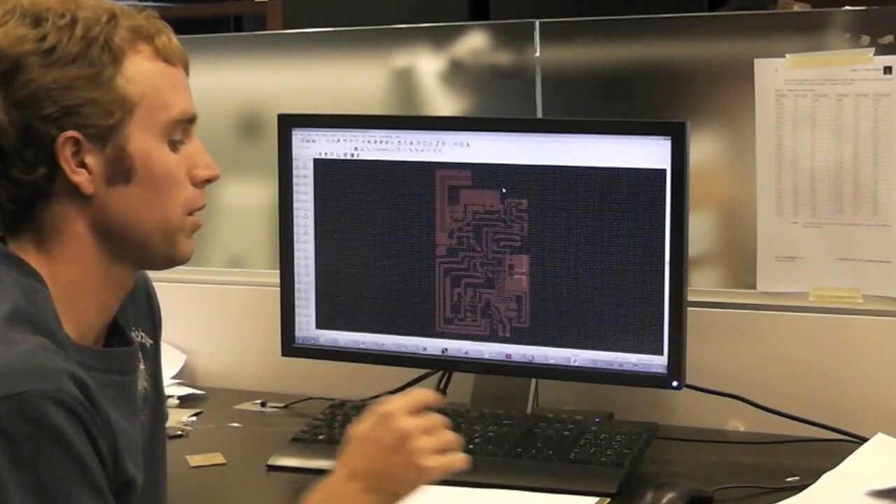We've created this layout. We're going to export it to a Gerber file. We could have used different ways of converting it into a bitmap, but the way we're going to show is from a Gerber and then to a bitmap file. So I specify Gerber drill file here. Export it.

Then I need to convert it into a bitmap file, and I use a software called Magic. From this Magic software, I open up that Gerber file that I just saved with ADS. So now we have basically a pattern in our Magic software. The reason that we use Magic is because we can specify exactly the dots per inch that we want to print out.

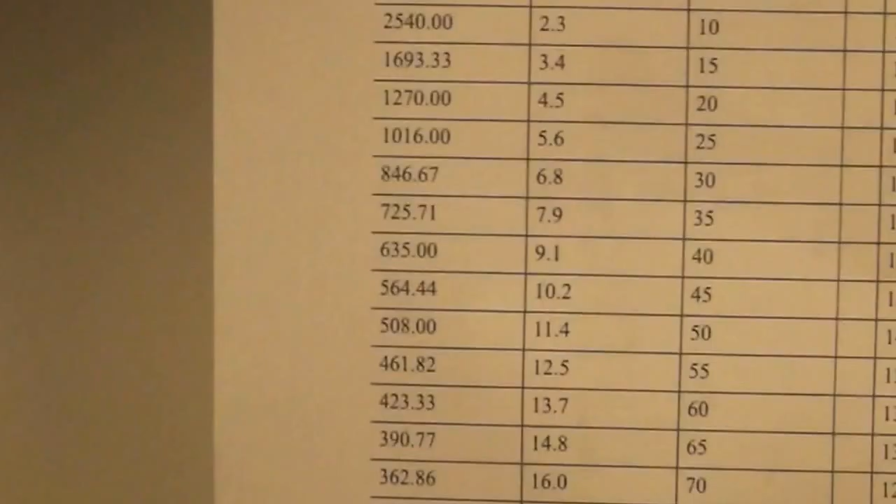These dots per inch correspond exactly to the drop spacing. There's a sheet in the printer manual that basically tells us this drop spacing. We're using a drop spacing of 20 micron, and that corresponds to a DPI setting of 1270. So next we just hit OK, save this file as a bitmap. That's it. Now we take this file and we're going to plug it into the printer.

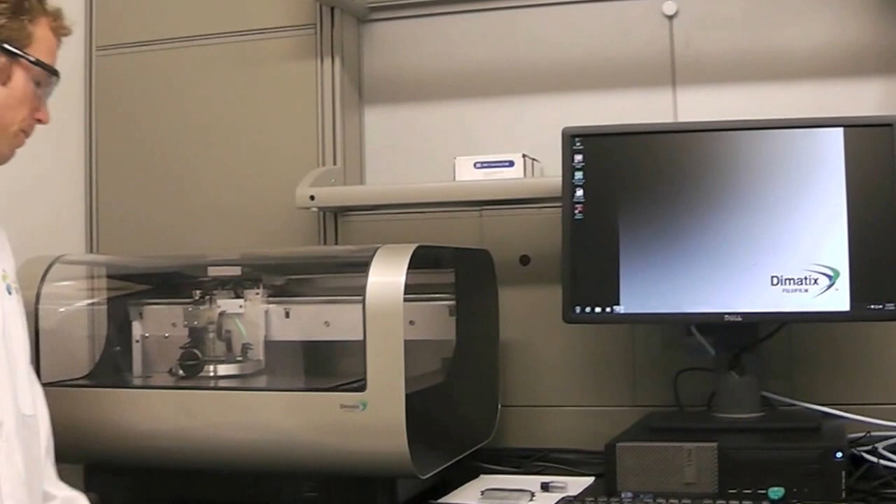Okay, so now we're in the lab, and this is the desktop printer that we use. We've just taken a USB from upstairs with the bitmap file that we generated, and we put it into the computer. The computer is hooked up to the Dimatix printer, just like a regular desktop printer you'd have at home.

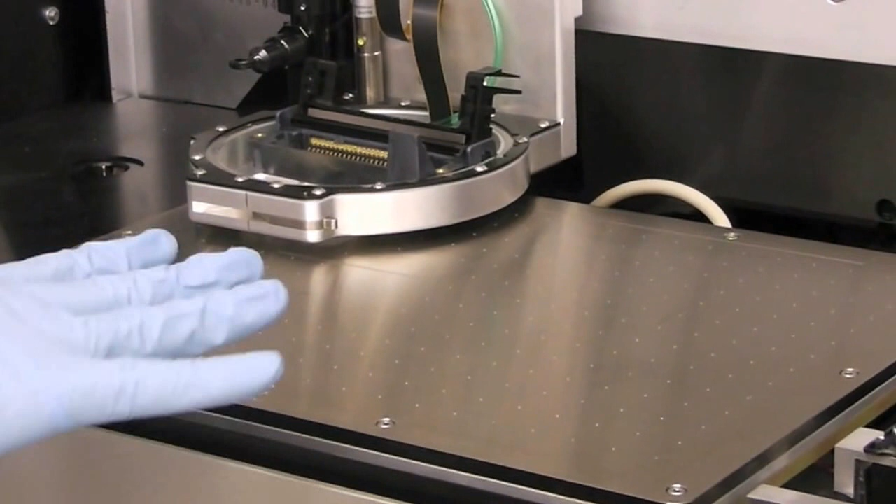It's a little bit different than your desktop printer because it has this stage with 5 micron accuracy of placement. This is called the platen, the stainless steel plate, and it can move up and back, and it can also rotate, so you can align your pattern and the drops will land where you want. This printer does raster scanning, so this cartridge holder is going to go up and back and work its way down the platen to fill out the pattern.

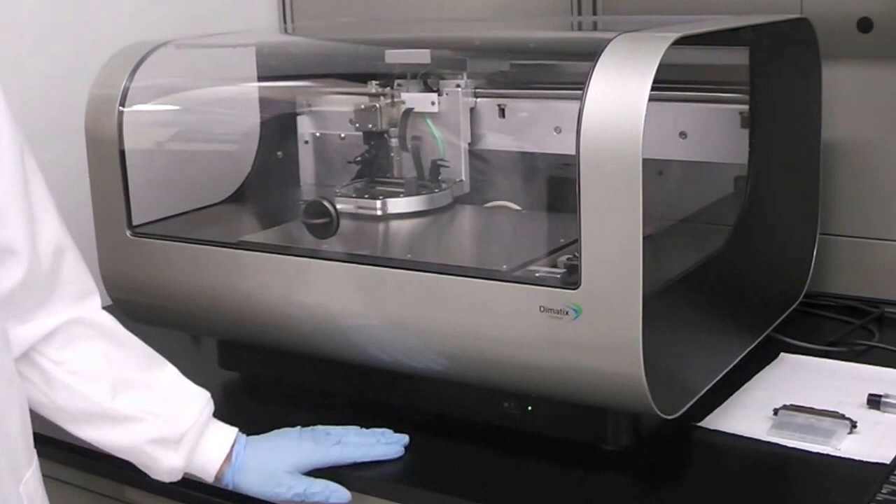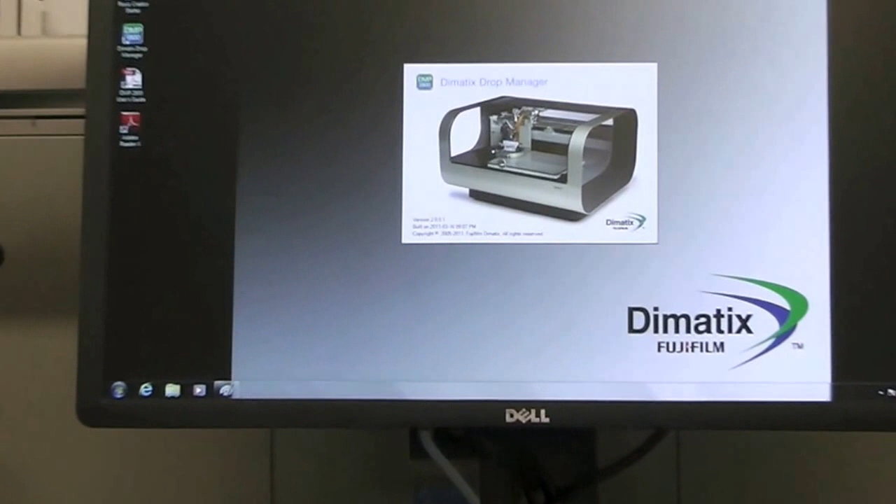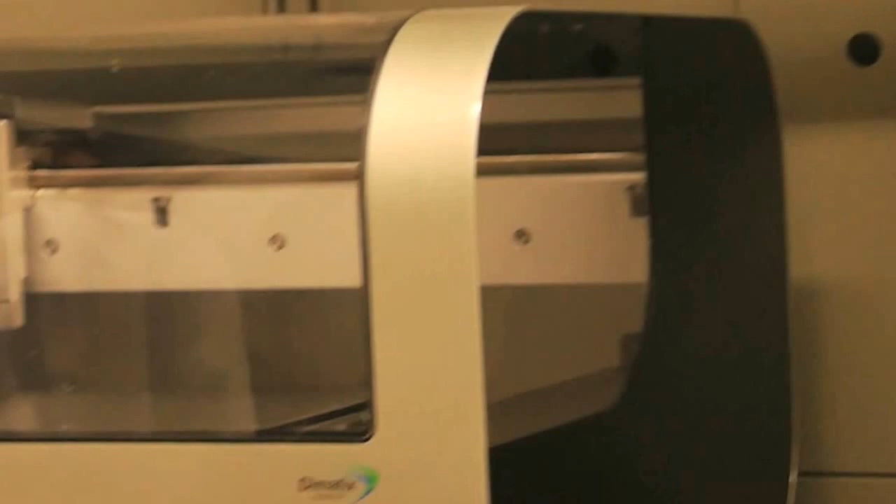So we'll just turn the printer on right now. This is the Dimatix Drop Manager software, which controls the printer. When it first starts up, it does a calibration. You have to make sure nothing's inside the printer when it does this. The stage moves back and forth, and the cartridge holder moves around for its initial calibration. Alright, now the printer is ready to use.

So we can load that bitmap file that we had previously. We just go to Tools, Pattern Editor, Bitmap Images. This is the bitmap pattern converter. From here we load the file that we had upstairs, open bitmap, and here's the image that shows up in the software.

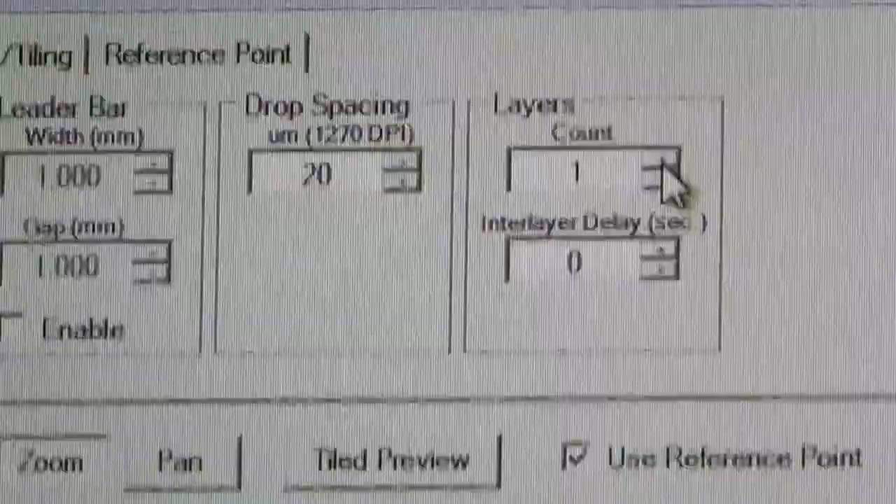Now on this screen we can change the number of layers. Let's say you printed one pattern with one layer of ink, and then you wanted to increase the amount of ink, so you would just print right over top with another layer. You can do that here with the layers count button, increasing it to however many layers you'd like. The drop spacing is also set within this program. Because upstairs we did the bitmap image with 20 micron drop spacing, we're going to do the same thing.

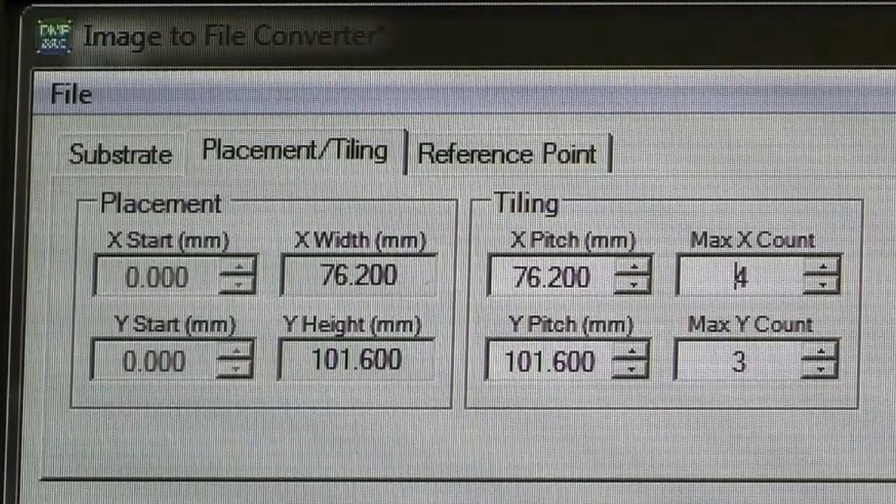Okay, this tab is for placement and tiling, and we can multiply the image. So if you wanted to make 5 of these images instead of just having the one here, we just increase this count. And you can see all the images get duplicated. However, that's going to take more time to print, so we're just going to show one for this example.

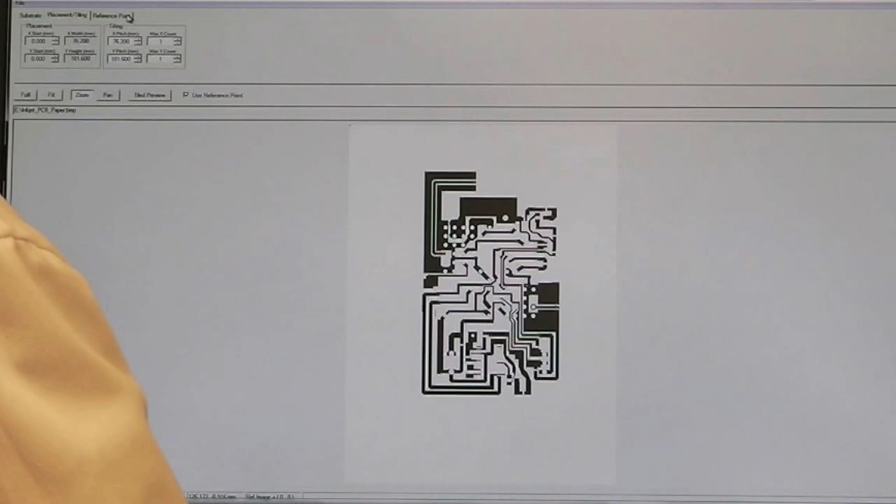Also, you're able to pick a reference point on the image. So this kind of tells the printer in reference to the image where it will start printing. So for example, if we picked the top left point of the image and set that as our reference point, that's where the first drop of ink is going to land. So when we pick that point on our platen, that's where the image is going to start being printed. And now we just save this file.

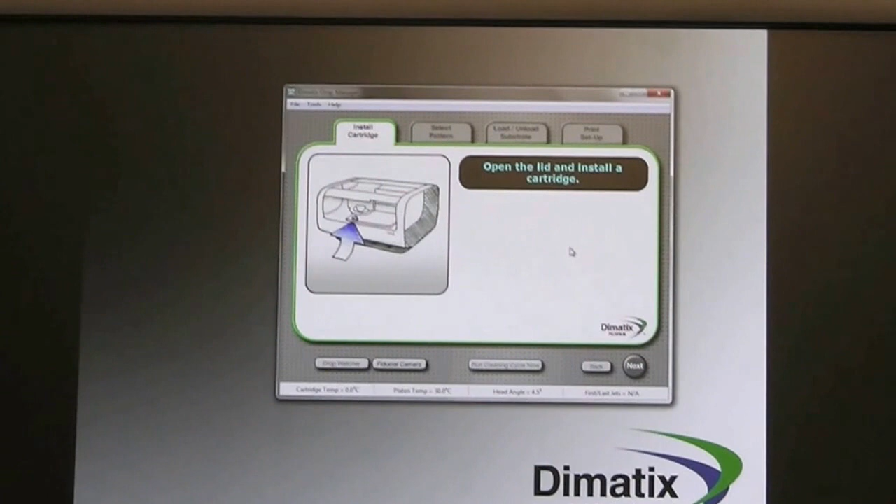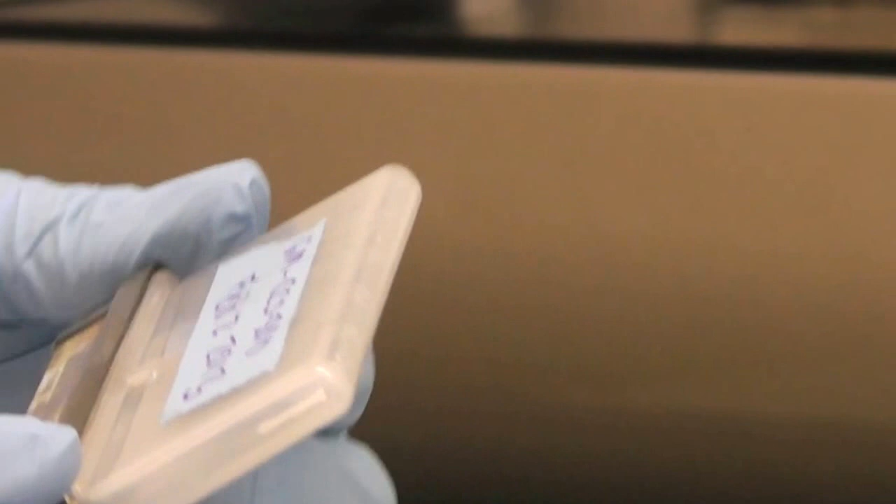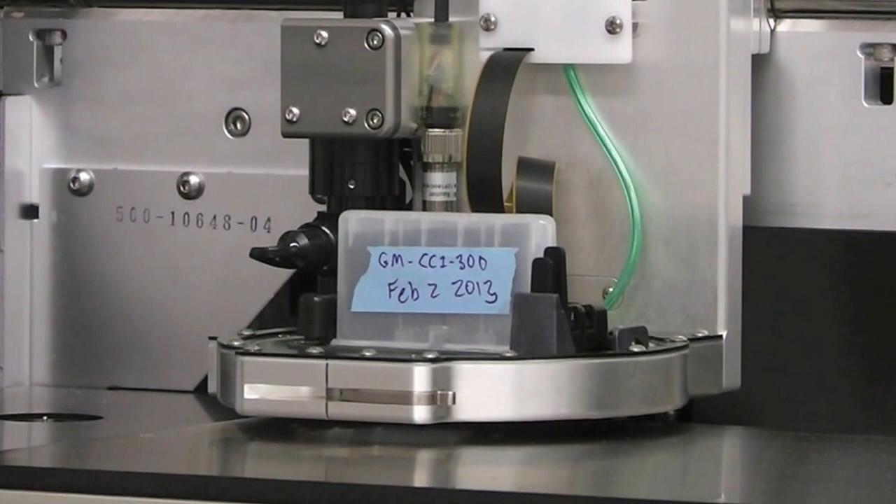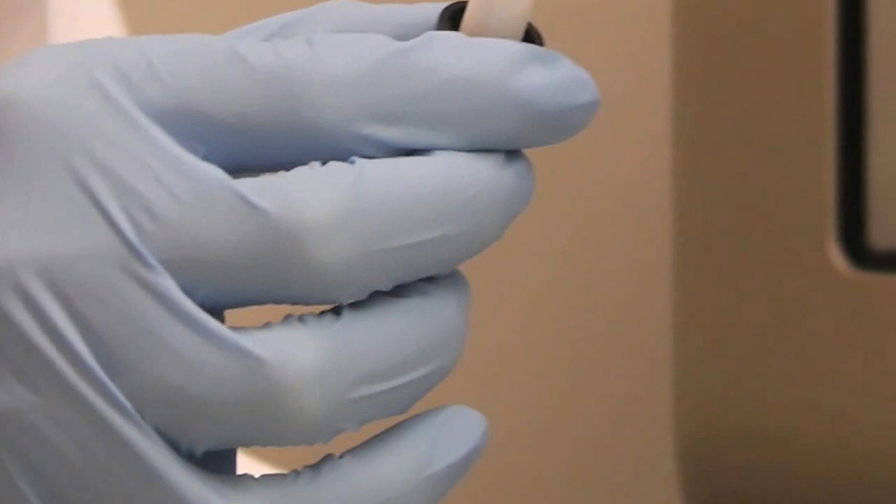And they just snap right into the printer. So this is a cartridge holder. We just snap them in and out. Also, there's cleaning pads that we use because sometimes there's ink that builds up on the bottom of the cartridge. So the cleaning pad is just like cloth material that the printer dabs on to clean off the excess ink.

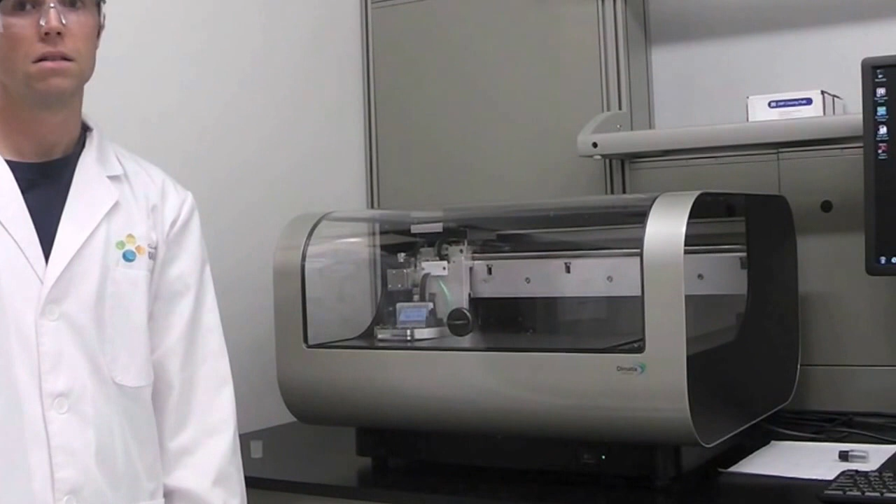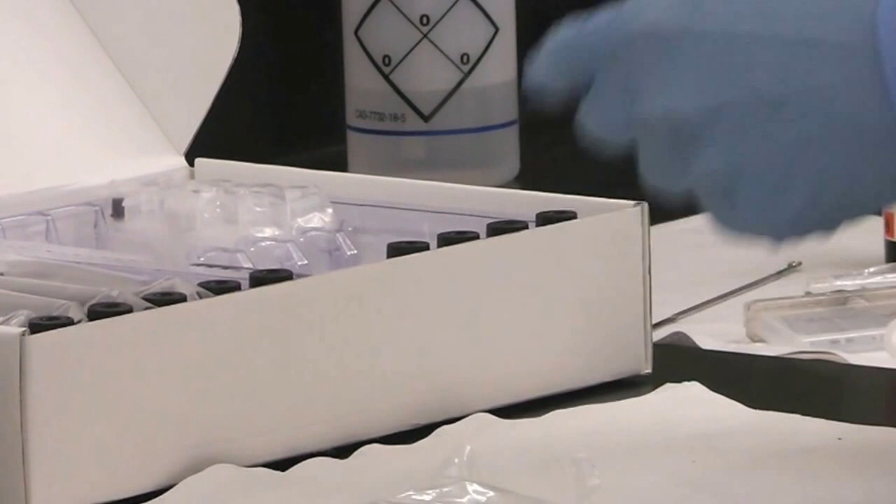Okay, now I'm going to go over there and show the cartridge put together. Okay, so this is the Dimatix material cartridges that we're going to use with this printer. I mean, there's other companies that make their own cartridges that go with their own printers. This is just for the Dimatix. This is what we're using. And the cartridges come in two parts. So there's the cartridge head, and then there's the ink reservoir.

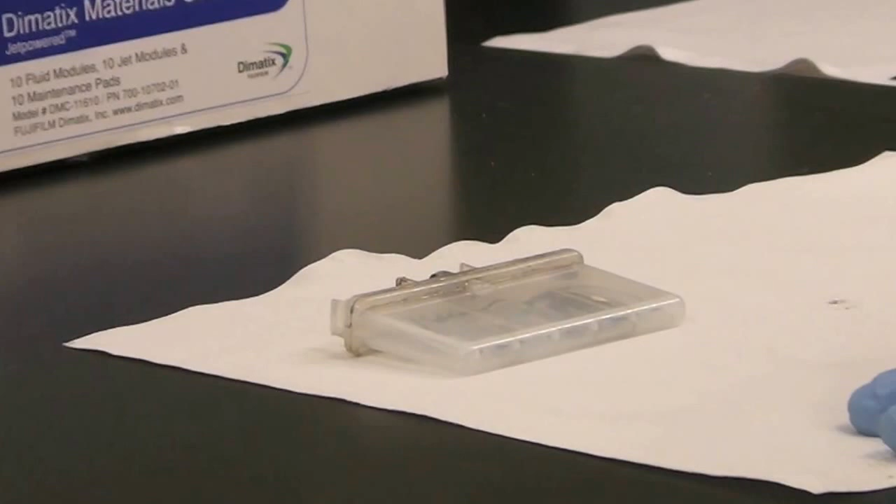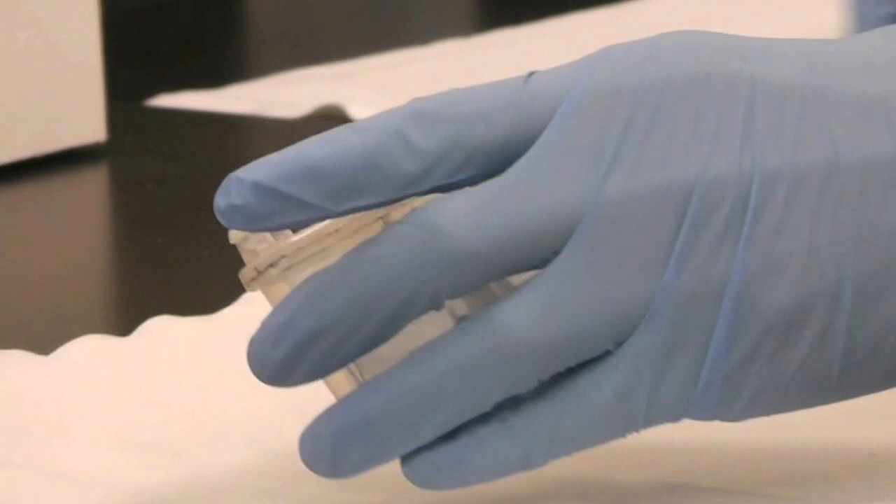And instead of opening a new one, I'll just show an older one that we have. So this is a cartridge head that's been used, and this is the ink reservoir that's been used. And what we do when we take a new one out, we physically just take a syringe and a needle. Hopefully I don't stab myself.

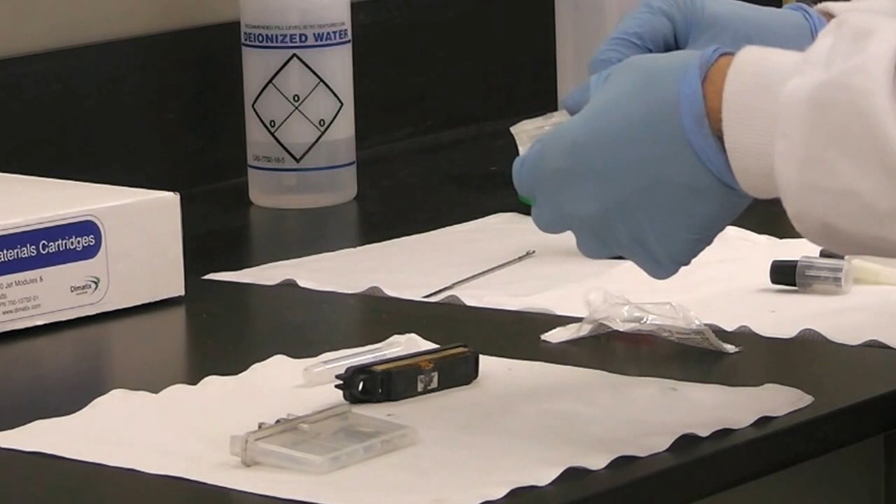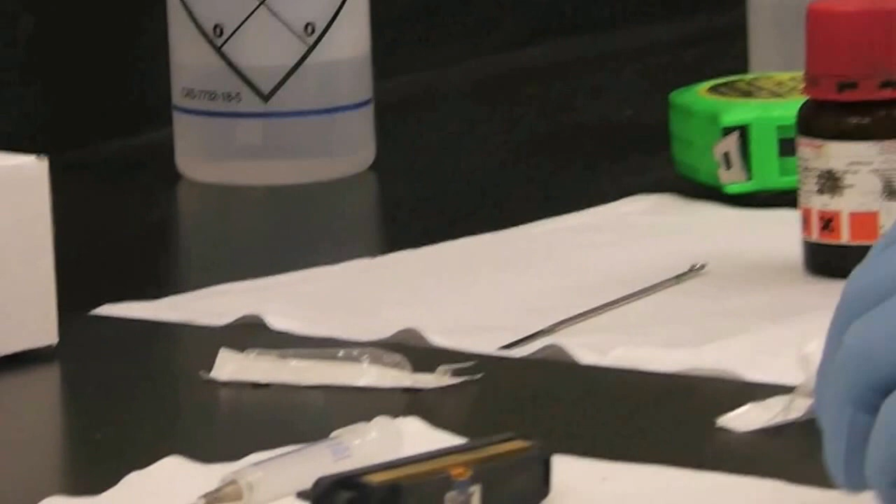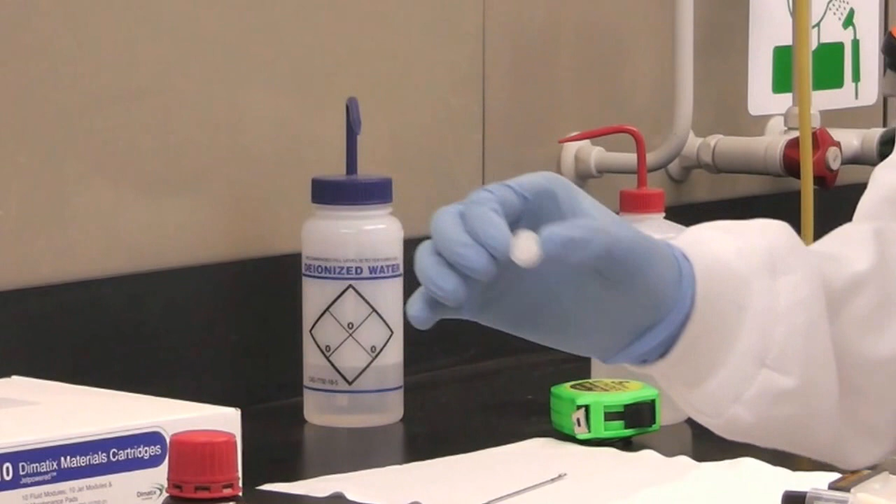And we're going to use commercial ink for this example, but there's all different types of ink that you could use. So this is a silver nano-particle ink from Sigma Aldrich. And we just basically open this up, draw out the ink, and then before we fill it in the cartridge, because we don't want large particles to clog the nozzles, we use a filter, and we're using a 0.2 micron Teflon filter, and we put that in the needle. Imagine it was filled with ink. And then we physically just put the ink into this cartridge.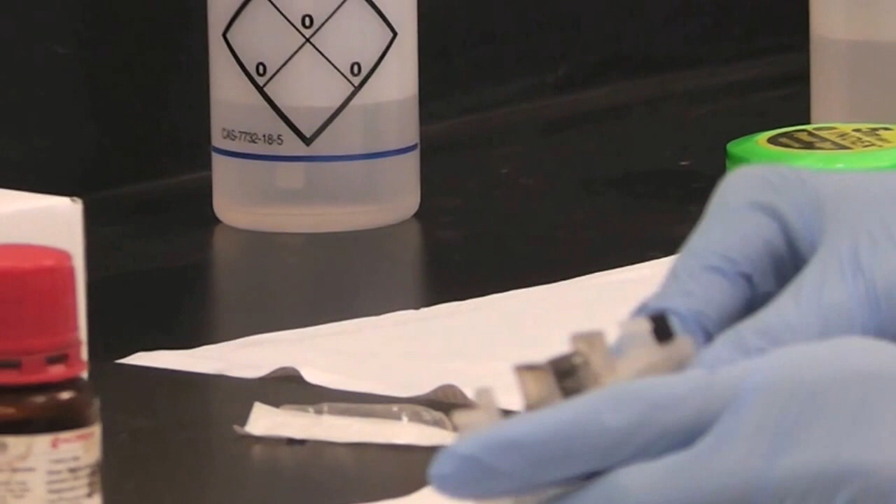And Dimatix cartridges have this locking mechanism so that once they are put together, they're stuck. What we do is there's two tabs here, and we just snip off one of the tabs so that we can reopen and close them. So if you want to refill the same cartridge with ink, it's easy to do. Then we just put them together. They just snap.

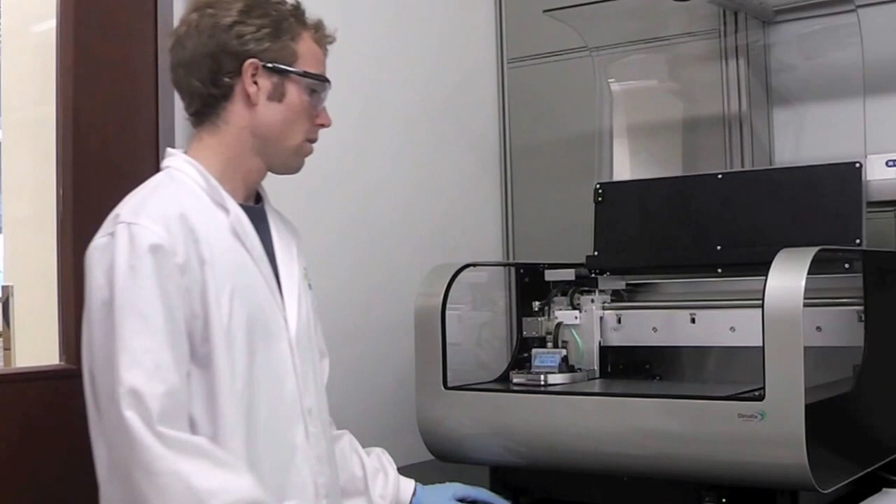That's that. So this cartridge that we have right now, this was filled for the first time on February 2nd, and now it's May. So we've used this cartridge quite a lot and refilled it. And you can see that there's actually quite a bit of ink leaking around, and it's quite dirty. So this cartridge is probably on its last legs, and we might want to throw it away and get a brand new cartridge. But we'll try and print with it and see how it goes.

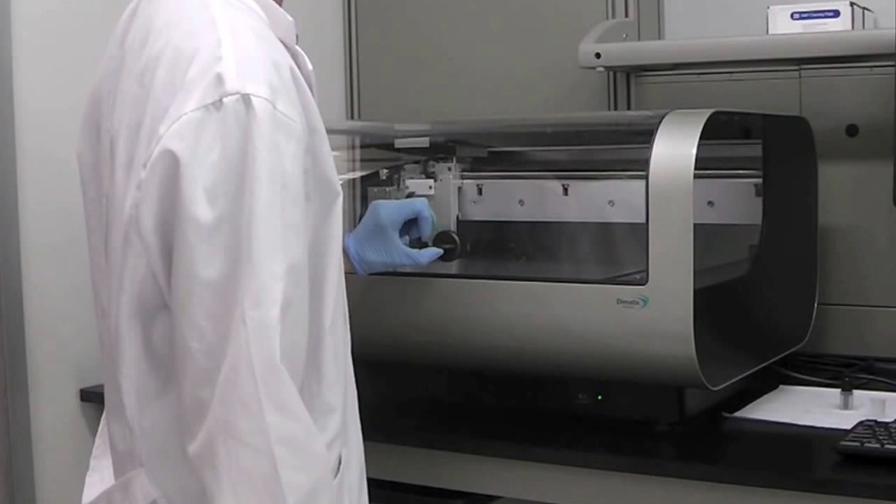Okay, so back to the software. The first step is that the printer asks you for the cartridge settings, and inside of here is the voltage waveform. Because it's a piezoelectric printer, it uses a waveform to eject the ink. So we have a preset waveform that we use for this type of ink, and it has to be tailored for the ink that you're using. I'll just show you the waveform here.

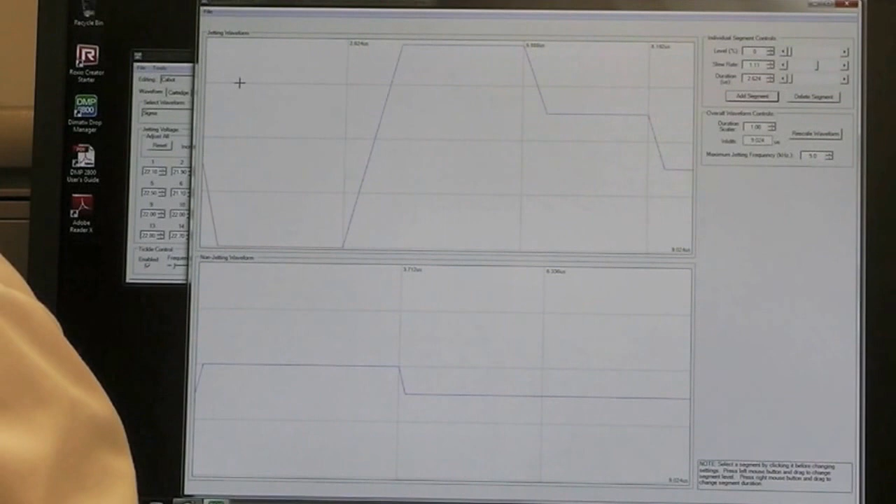So here's the waveform that we are using, and this can be changed. All these different points can be changed. So this is a voltage; the x-axis is the time, and the y-axis is the voltage. So this is our jetting waveform, and you can change the settings of this waveform with these controls here.

Also, there's a non-jetting waveform, and this is just kind of to tickle the ink when it's not being used, so that it's kind of stimulated so it doesn't settle to the bottom, or basically so that it won't print while it's in an idle state.

So the next part is selection of your printing pattern. And we just select that pattern file that we chose before. And it shows you a little picture of the pattern on the side so you don't get confused. And the next step is to load your substrate on the platen. So the substrate we're going to use is HP Inkjet paper. But we could alternatively use plastic or glass or whatever you'd like.

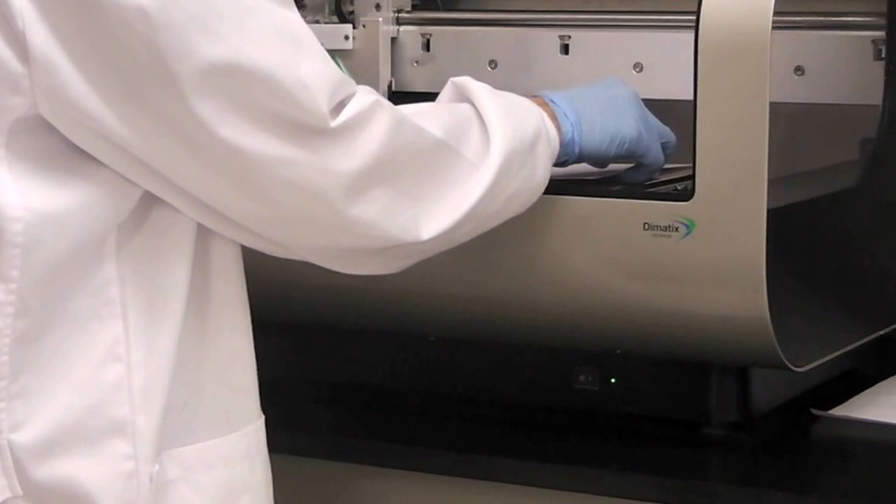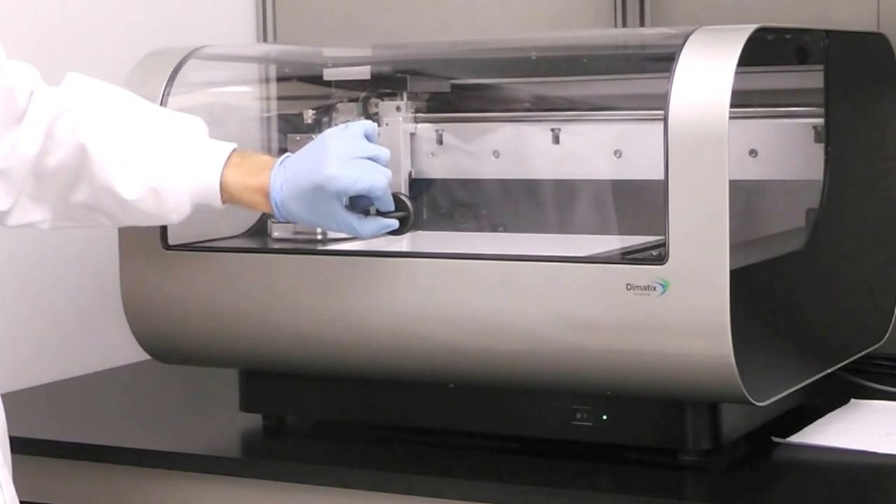And the platen has holes in it with a vacuum. So when the vacuum's turned on, you put the paper over top of it, align it on the platen, and it'll suck it down. Oh, the vacuum isn't on. There we go. So now that sucks your paper down flat. Okay.

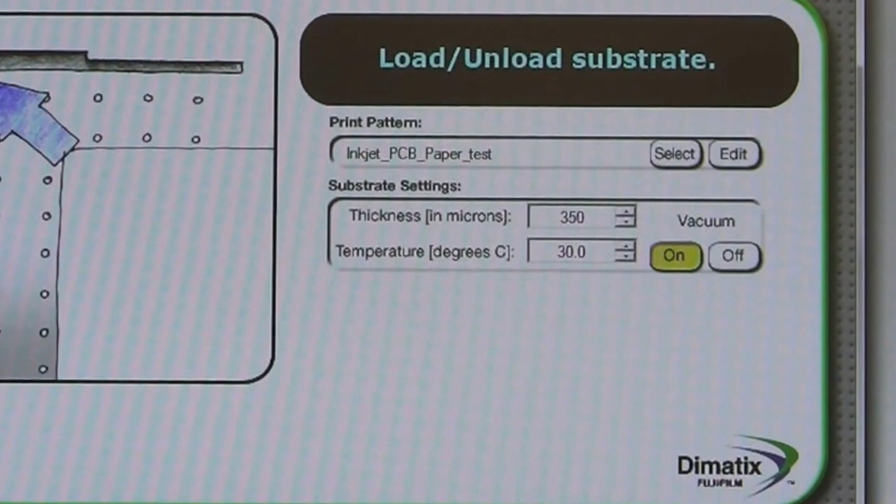So now that we've loaded our substrate, it asks what's the thickness of the substrate. So you can set the height above the substrate that you want to print. If you make it too high, the drops actually start to waver and they won't land where you'd like. So you'd like to print as close to the surface as you possibly can. So we're going to choose 560 microns.

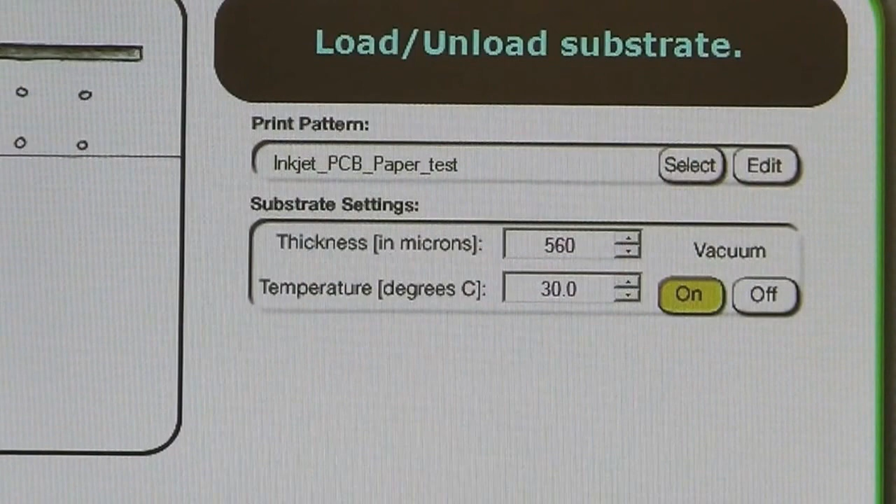This is also where you set the temperature of the platen. So I'm printing at 30 degrees Celsius, but it goes up to a maximum temperature of 60 degrees. Okay. Just as a final check, the last screen just asks what the thickness is. This is the temperature, this is the pattern that you're using, and these are the settings that you're using for the printer.

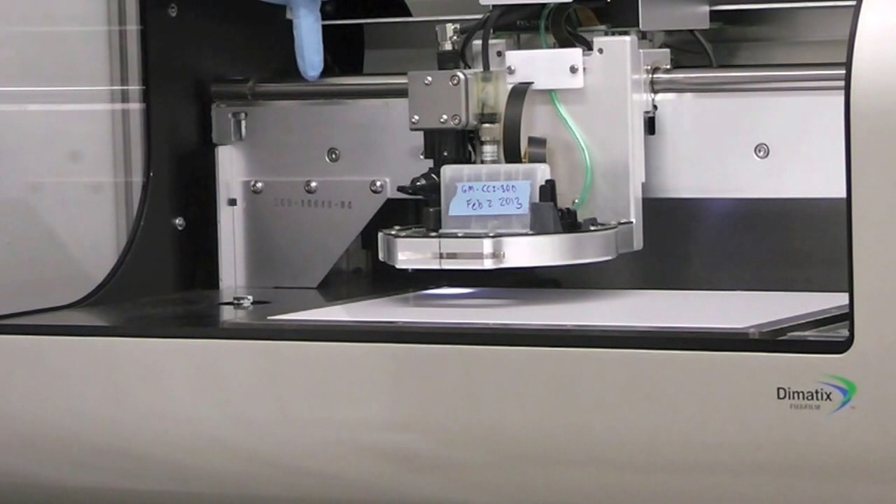Then what I normally do is I choose my point on my printer that I'm going to print, and I use the fiducial camera button to do that. So inside of the printer you have this camera right here, which is a fiducial camera, and it shines a light on the paper, and there's basically a cross you can see in the software where it's pointing at, and you can pick the point where you want your pattern to start.

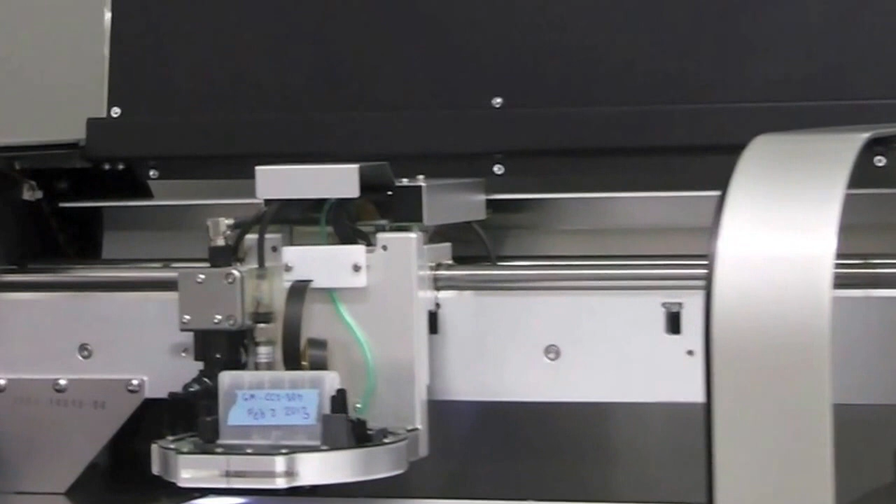There's also another camera over on this side, and there's a function within the printer that you bring your cartridge over here and you can actually see the drops as they're coming out of the inkjet head. And we'll show you that in a second.

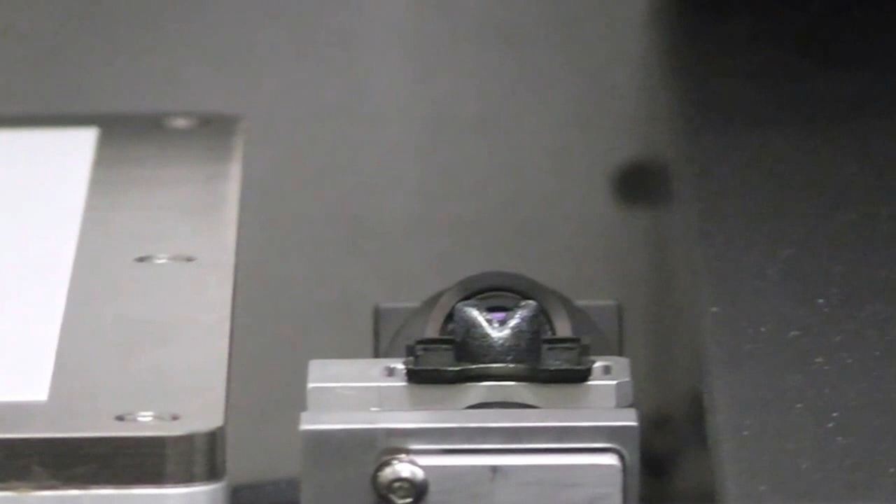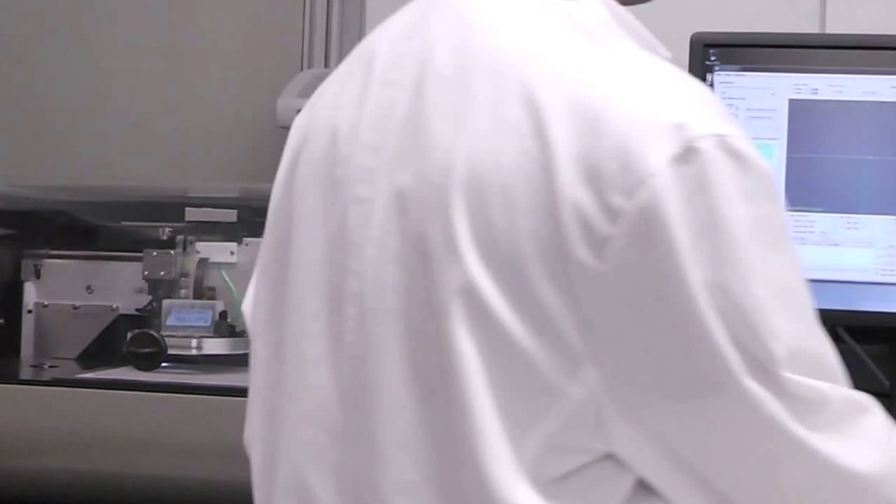So now from the fiducial camera, I can go anywhere on the paper that I'd like to start. So now I'm somewhere in the center of the paper. I have a small pattern, so this is fine. So I could print here, for example. So to print here, I hit Set Print Origin and choose that position.

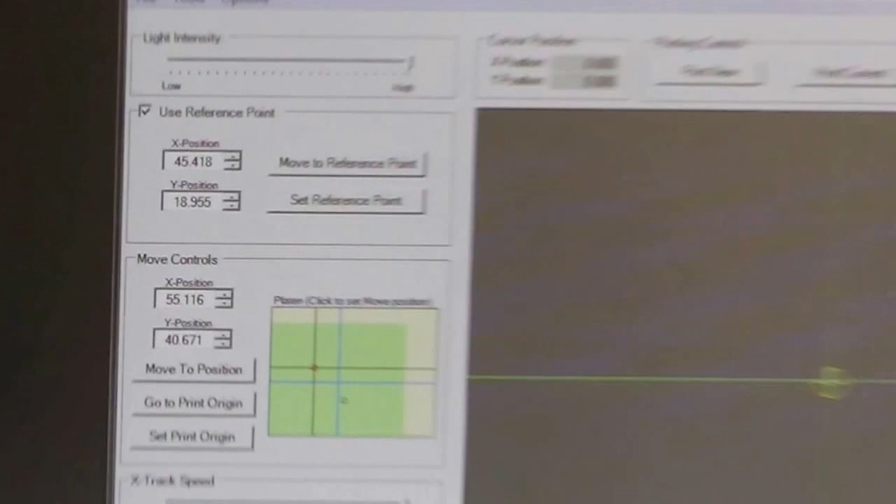And because I also use the reference point within my pattern, I also choose my reference point and put it in the same position. So I'm going to start printing there, and that's going to be where my pattern reference point was as well.

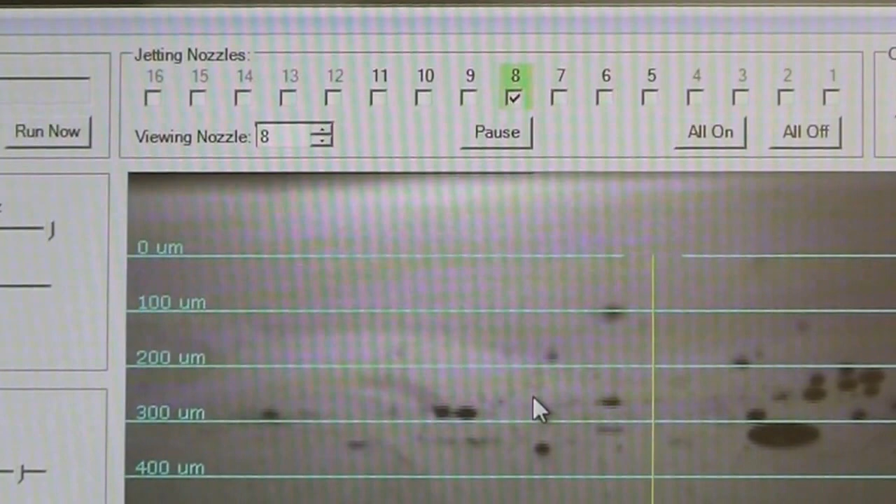So now I'm going to close the fiducial camera. I've picked my place on the paper to print, and I go to the drop watcher. So this will show me if my cartridge is actually going to work. So here, there's 16 nozzles on these cartridges. And you can choose any of these 16 nozzles to print with, or you can print with all of them if they're all working.

So we can see that the drops are coming out of the nozzle on position 8 and 7. And I can shut this movie mode off, and it just does a strobe. So you can see how fast these ink drops are coming out and what they look like. You can see that 8 is on kind of an angle and unstable. So I definitely wouldn't use that.

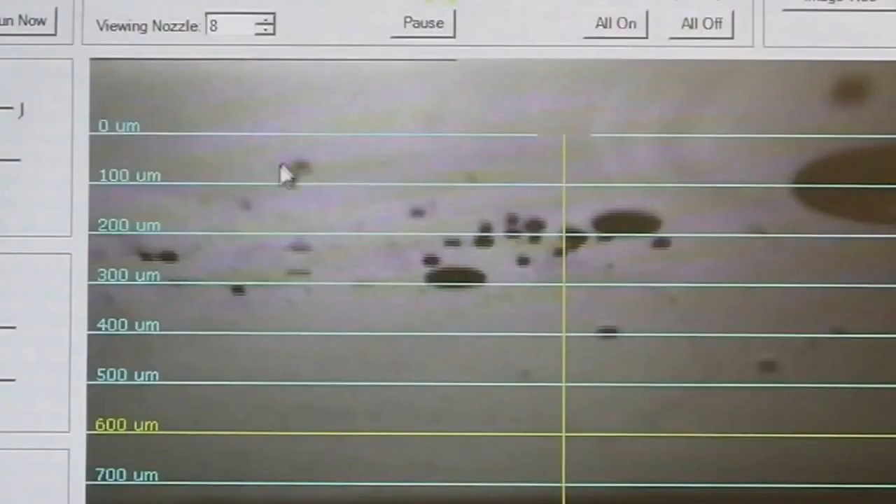Six is also not looking great. It's not too bad. And I generally print at a velocity of 9 or 10 meters a second for this ink. So if I say the delay is 100 microseconds, and there's distance markers on this screen, so if the ink drop started at 0,

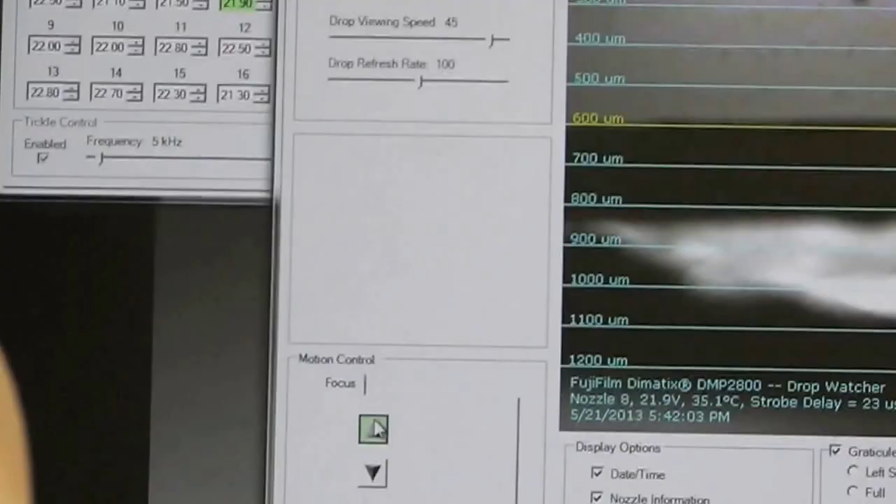I'll just change this. You can also focus this camera by using these arrows. So here we're starting at 0, and if I look now 100 microseconds later, I'm down at about 800 microns.

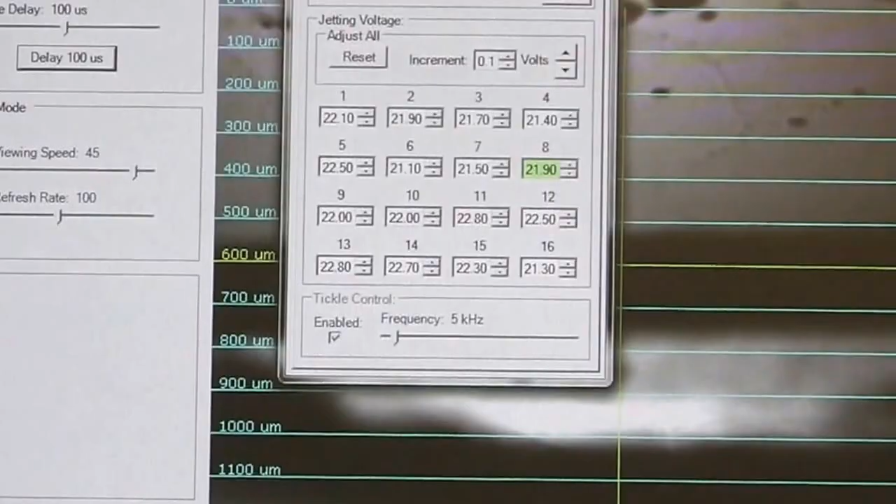So I'm just going to increase the voltages. In this screen you can increase the voltages of each of the printing nozzles individually. So I'm going to increase 8 just a bit, or 7, so that it hits 9 meters a second.

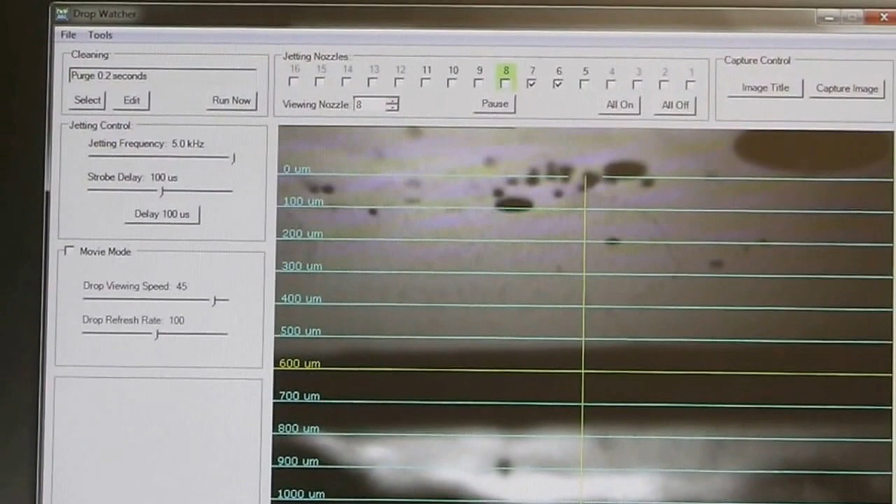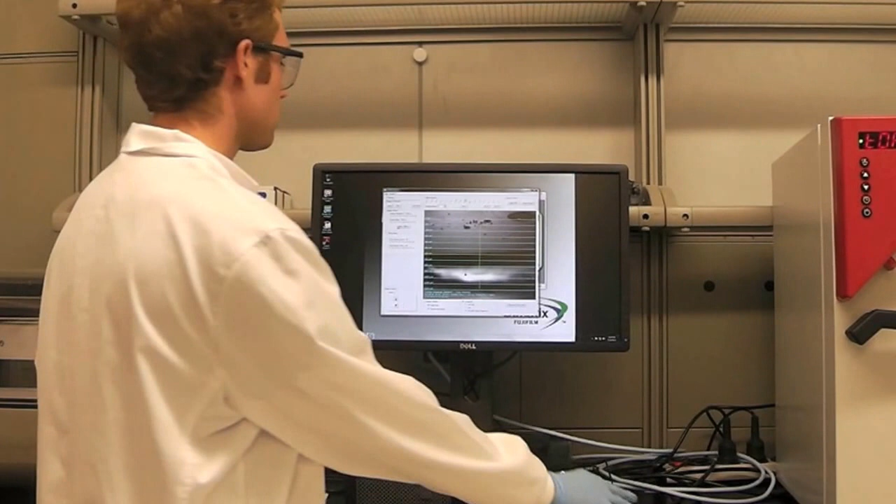Okay. Also 6 has become unstable now, I think because this cartridge is getting old. So I'm only printing with the one nozzle, 7. So within the cartridge settings, you need to tell it that it's only going to print with number 7. So I say that the first jet is 7, and the last jet I use is also 7. So only one jet is going to print.

Inside of here, you can also set the temperature inside of the cartridge. So with some inks, you might want to use a higher temperature. Depends on the viscosity and the characteristics of your ink. You can also set this meniscus vacuum, which is the vacuum inside of the cartridge head. So if you didn't have a vacuum inside, the ink might just fall out depending on the ink. So this keeps the ink inside of the cartridge.

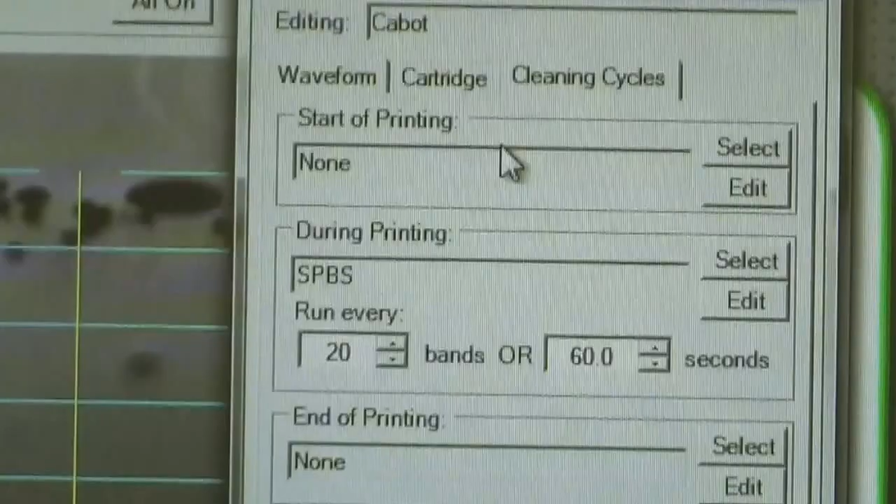There's also cleaning cycles that it can run. So while you're printing, maybe you want it to print for 1 minute or 10 minutes, and then it will go over to its cleaning pad and clean off any excess ink. You can also get it to purge out some of the ink in case it's been clogged.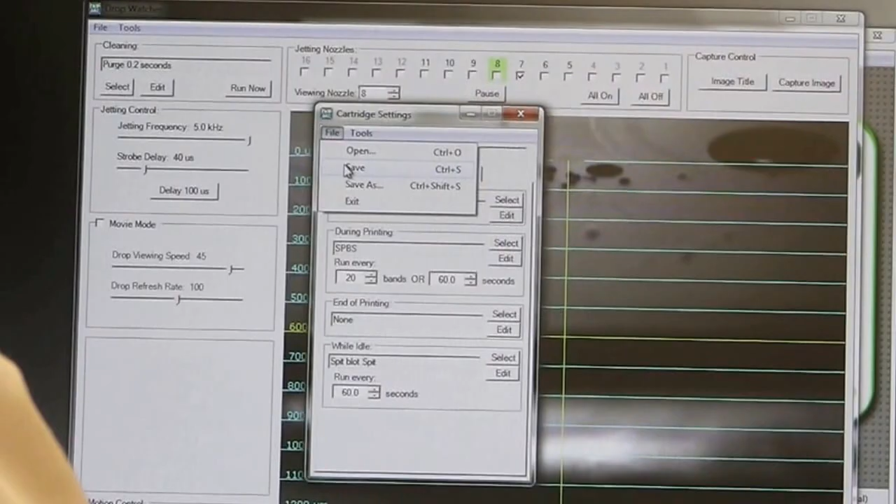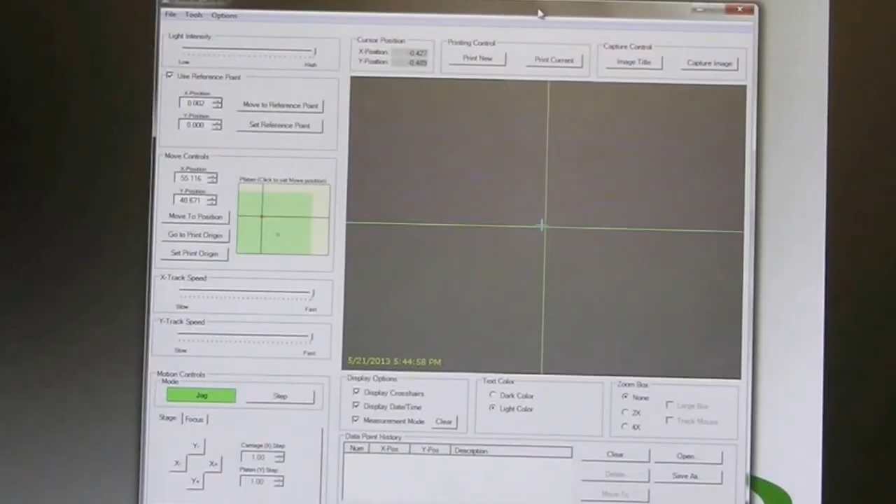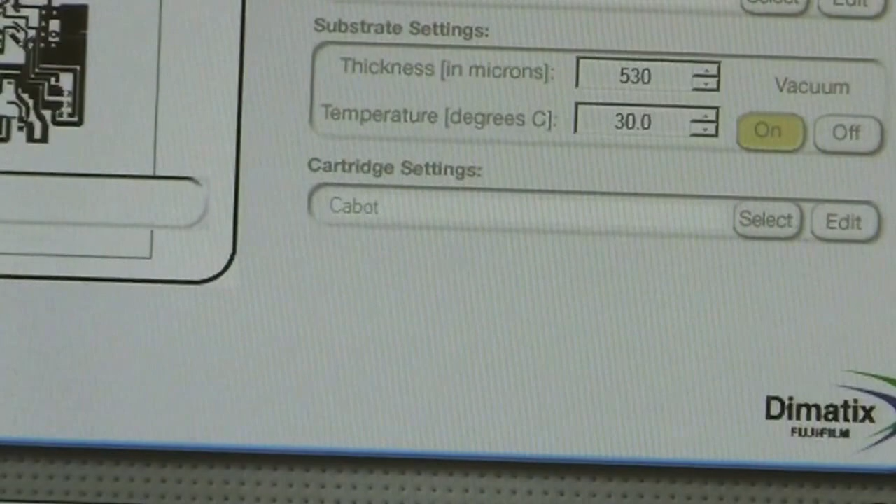Okay, so we're just going to save these settings. I'll save in the drop watcher. When you're using a reference point, you have to have the fiducial camera open in order to make it use that reference point. So I just reopen the fiducial camera and hit print. And it asks, do you want only one jet to print? One layer? Yes. Now it starts printing.

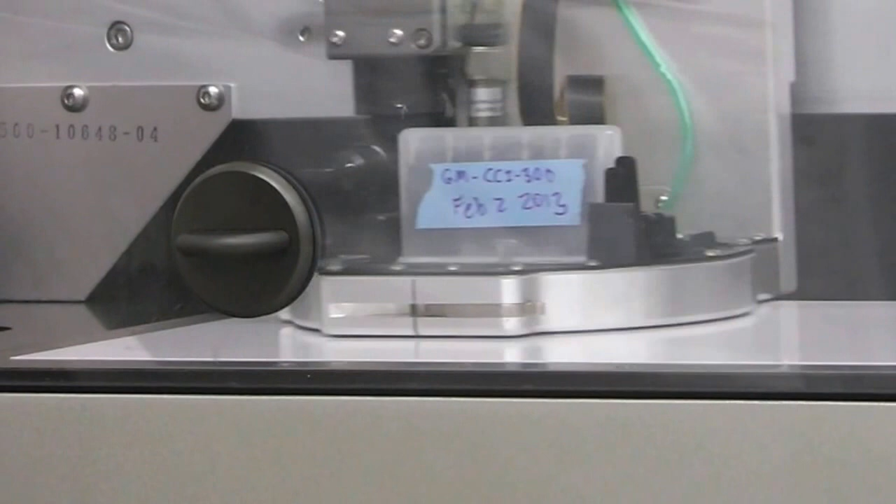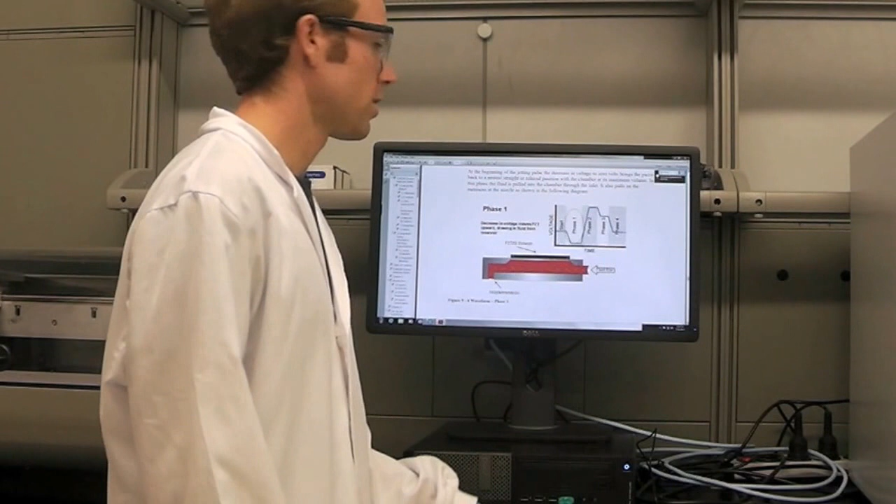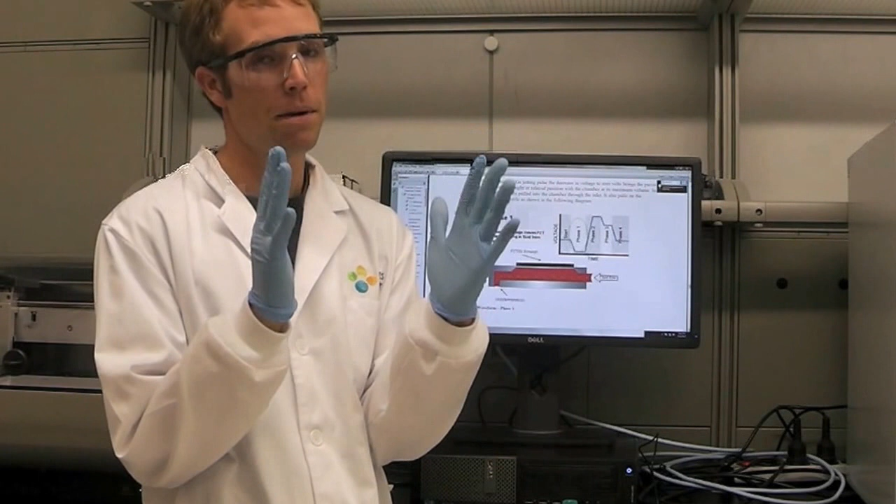Okay, that's it. Just to expand a bit on the waveforms, they're not actually that difficult to make, and the Dimatix comes with a bunch of standard waveforms for different inks as a good starting spot. Basically, you have this piezoelectric material, and you're applying this voltage to it. So in order for it to drop a good drop, you have these different phases, typically 4 phases, and you are gonna squeeze the ink, let it come out, squeeze it more, and this enables it to drop a good drop of ink.

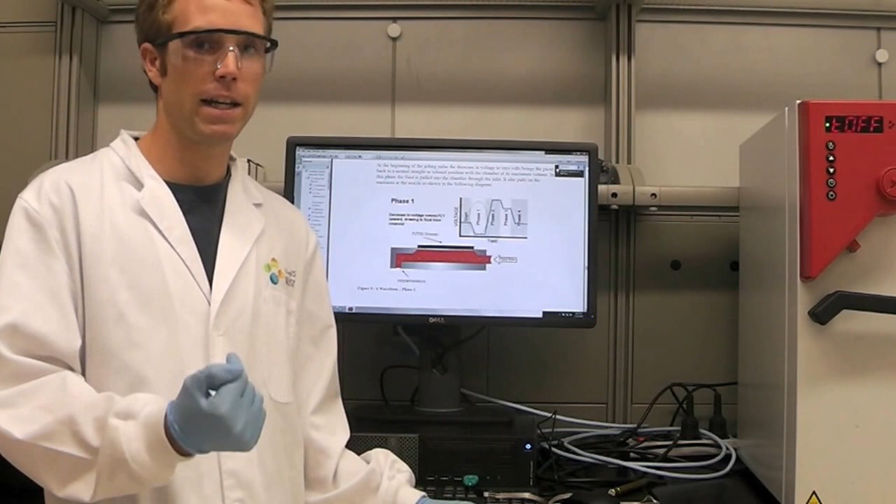When I get a new solution that I'm gonna print, I basically take one of these standard waveforms, and it's really trial and error just to move the timing and the amount of voltage that you're going to put on it in order to get good drops. And then I go back to the printer and see how it's printing and then modify it again. And it just takes a bit of time going back and forth.

Just another point about the cleaning cycles. There's 3 different options to clean the cartridge. One is spit, one is blot, and the other is purge. So spit means that it goes over to the cleaning pad and just drops the ink. Blot, it goes over to the cleaning pad and actually pats the cleaning pad. And purge you use when the cartridge is blocked, basically, and it applies a bunch of pressure to the cartridge and purges out all the ink of all the nozzles. And sometimes that's necessary if you're not getting the ink to jet out.

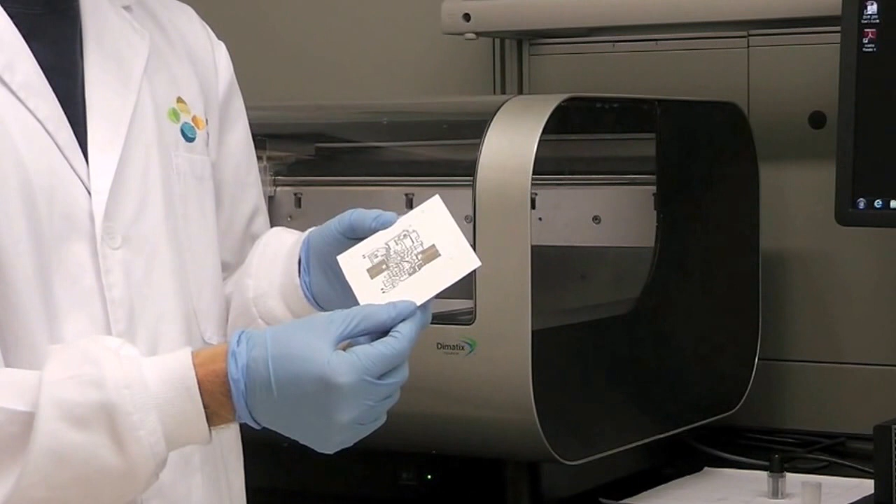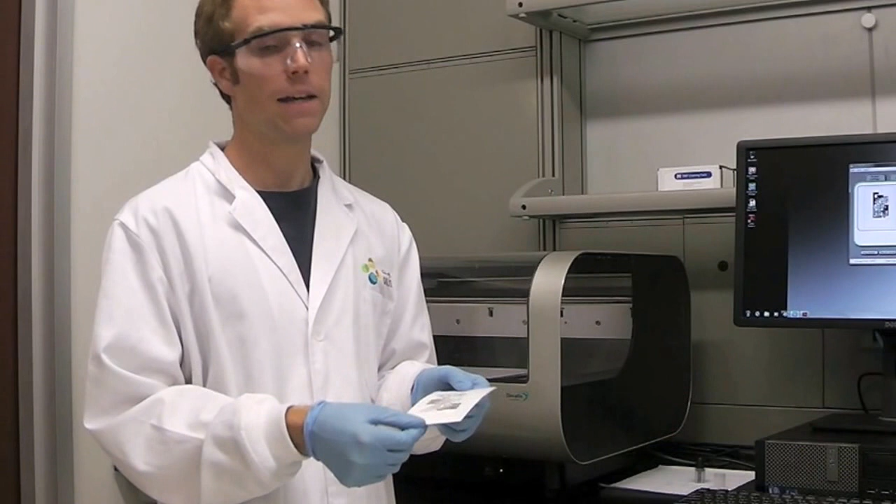So this is the finished printed paper PCB, and after it's done printing, we put it in an oven or on a hot plate and have to heat it up somewhere between 100 and 200 degrees Celsius. And we do this because this ink is silver nanoparticles. So you have solvent and silver nanoparticles. We drive the solvent off and dry it. Then the silver nanoparticles become fused or packed together, and that gives you the conductivity from the ink.

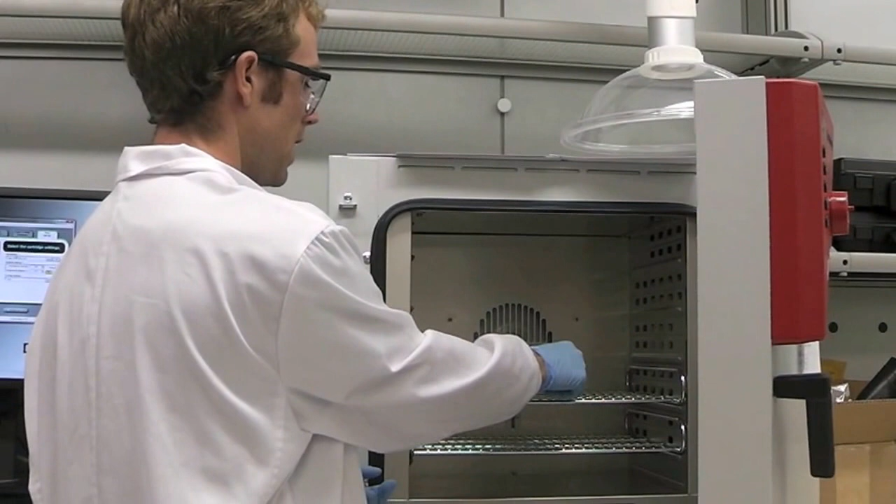And this is a regular laboratory oven that we use, and we just set our samples inside and turn it on. That's it.